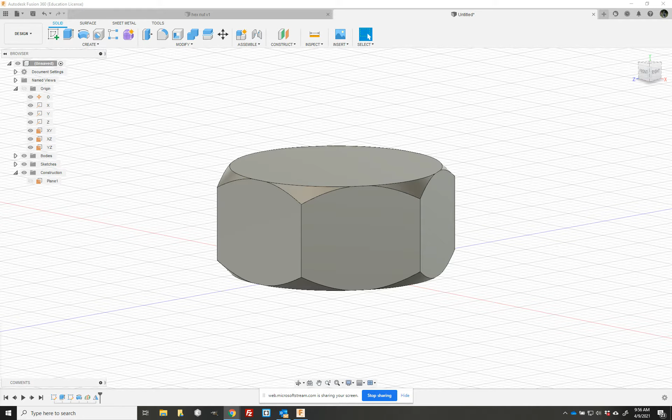As you see here, we have our hex nut, and the sides are complete. We are missing the hole so we can screw it onto a bolt. If we don't have a hole with threads, that would be an important part missing. So to do this, we're going to use the hole tool.

Like I mentioned in the first video, we could sketch out a circle and extrude it to cut away the material and come back and add threads to it. But in this particular case, since everything kind of falls in place and it's ready for a simple hole with threads, we can use the hole tool. So there's the hole tool. We can click on it here, or we can go Create, Hole. There we go. Here comes the palette up.

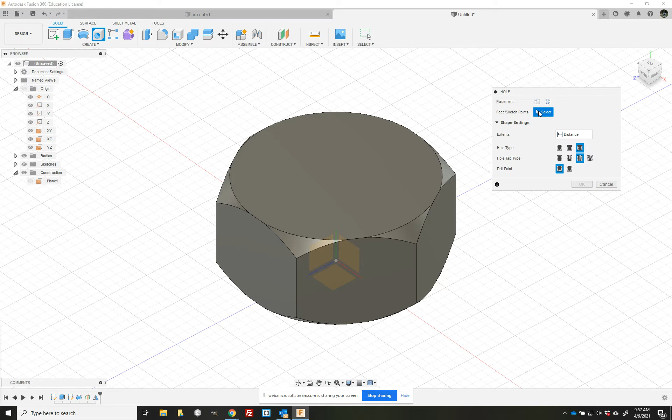All right. Now, first thing we're going to do is decide what face we want to put the hole on. So I'm going to select the top face. Face is selected. And now I need to position the hole. It's got a lot of the variables in from when I've done this before. I'm going to switch these back. Oh, because it's an M12 already. Well, let's just leave that as 12, I guess.

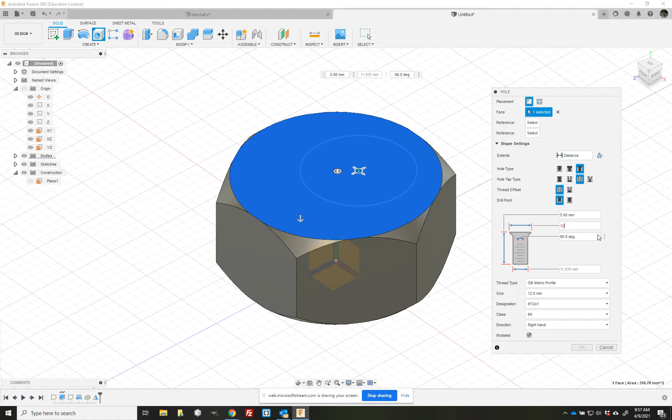All right, so I need to position my hole. Go to the top view, okay? If I can't see where to position it, it doesn't do me a whole lot of good. So there's the center point of the hole right now. I want the center point of the hole to be on the origin, and I see the origin here through the top view. I'm going to click on the origin, and it snaps the hole to the origin. All right, so that's all good.

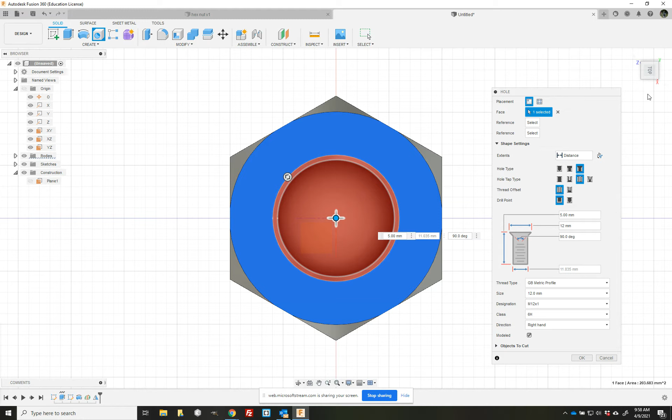Now your hole type should be countersink, okay? The hole tap type is tap. Thread offset is full, and the drill point is flat. All right, now I'm going to go back to the home view. The depth of the hole: grab this arrow right here and drag it down to 10 millimeters. There we go. The nut, how far did I extrude the polygon to begin with? 10 millimeters, okay? So we need to cut our hole 10 millimeters. All right.

This distance right here, which is the opening, we're going to give it a little chamfer edge on the hole, 12 millimeters, okay? Your thread type, change it to GB metric profile. The size of the hole probably came up at like 0.25 or something small like that; change it to 12. The designation is M12 by 1, okay?

Most important part here, check on modeled, okay? Modeled will actually create the threads in your design. If you do not have modeled, it's essentially just projecting an image of threads onto the face or the hole wall. If you want to 3D print your nut, it would not print. Okay, so you have to model your threads for them to be printable. So I've checked modeled, and now I'll click OK.

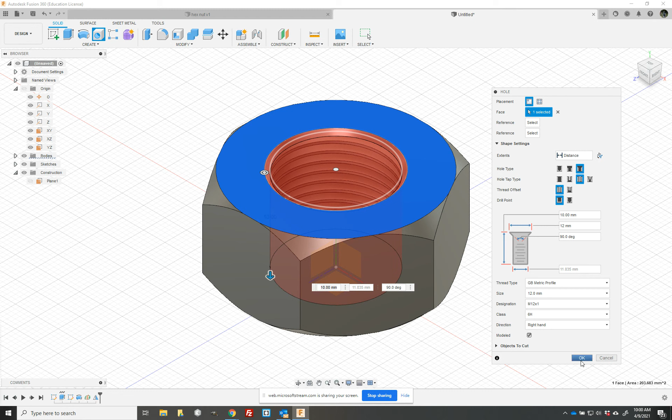And there are my threads. All right, flip that over so you can see them a little bit better. Notice the hex nut is the same on both top and bottom. All right, your assignment requires you to turn in a screenshot from the top view and from the front view, okay?